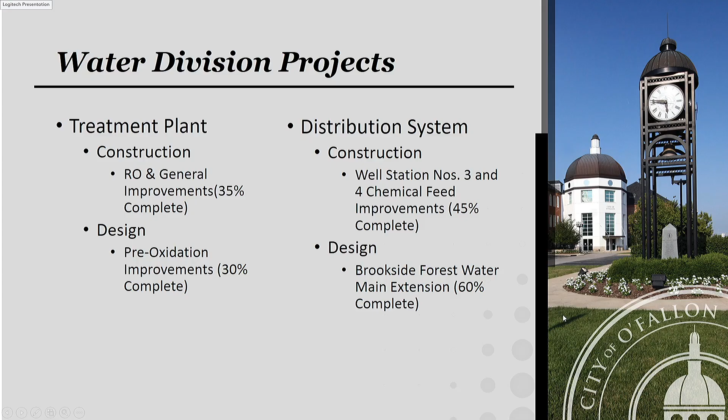As far as the distribution side of the water, we've got well 3 and 4 — water tower right here by Main Street McDonald's, and then the one behind Child's Tire on Service Road is water tower number 4. Those two are undergoing some chemical feed improvements. And in design, we got a Brookside Forest water main extension under design right now. Let me jump into some of those in more detail and show you where we're at.

The biggest project we got going on right now is our water plant project. It's about a $10 million upgrade. We're probably just not quite halfway through construction, I think. It's scheduled to be complete early next year.

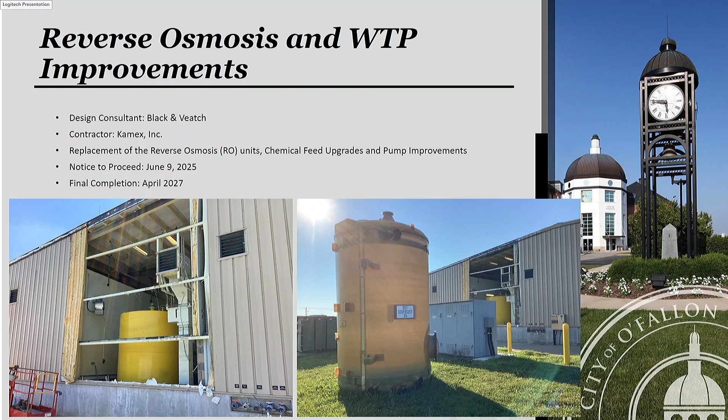They actually got that tank installed today. They'll be putting the sheeting back up tomorrow, hopefully before the storms get here. So, a nice little upgrade to our chemical feed system out there.

So those are a more energy efficient process for our plant, instead of just running a pump at 100% speed and regulating flow with valves. This actually controls the speed of the pump.

So if you can turn that pump down, you don't need to pump as much. You can save electricity by not having to run it at 100%.

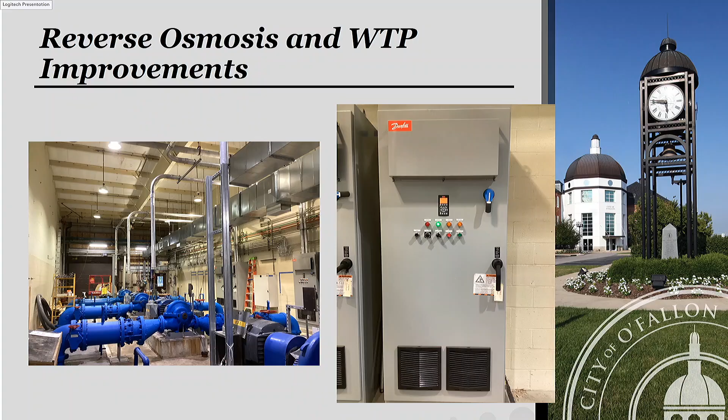Not much has really changed since the last update on the pre-oxidation project. We're just working through design with the engineer. They're working on getting the 30% design submitted to me, which should come in probably this month. Once we get that, we'll review those documents with the engineer, offer any comments we want changed, and then move on to the next step, which will be 60% design.

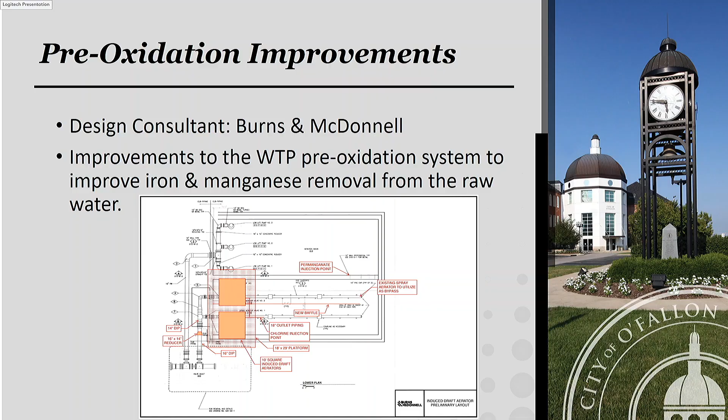It might go too fast, so if you got questions, feel free to shout them out. On the distribution side, this is the Well 3 and 4 project, chemical feed upgrades. Again, this is the tower along Main Street. There's a well house there, and then the tower I call Child's Tower, up North Outer Road there.

So they're currently at Well 3. We didn't want to shut both wells off at the same time to do these projects, so we actually have Well 3 turned off right now. Well 4 is still in operation, just because we're in higher summer demands with the water, the temperatures, and the dryness as the season goes.

So it's shooting to be done here in the next few months. It's going to take about 6 to 8 weeks each well to get the chem feed improvements in. It's new sodium hypochlorite tanks with transfer pumps and metering pumps, and then a new LAS, liquid ammonium sulfate tank, with transfer pumps and metering pumps.

That'll convert our chlorine disinfection product to a chloramine system, which will match our water plant and match all our other distribution sources in town. So it'll provide a better water quality consistency through our system.

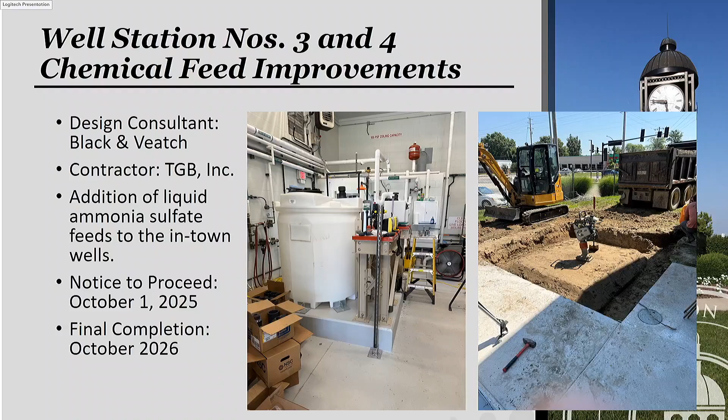Let's see, Brookside Forest Water Main. This one's getting close to wrapping up design. We've got 60% drawings here recently from the engineer on that. We've reviewed those, and I think they're now proceeding towards 90% drawings.

My project manager, Max, is handling this project, so I don't have all the details, but I know we got these drawings and reviewed them. So this one extends the water main, a new main from Progress West Lane over to the Brookside Forest area on the other side of Peruque Creek, just to give a redundant water supply to that area.

Right now there's one main that feeds that neighborhood to the west side of Peruque Creek, and if that main would happen to have a failure at some point, we would put a lot of people out of water. So this is just kind of a redundant source for that area, a backup.

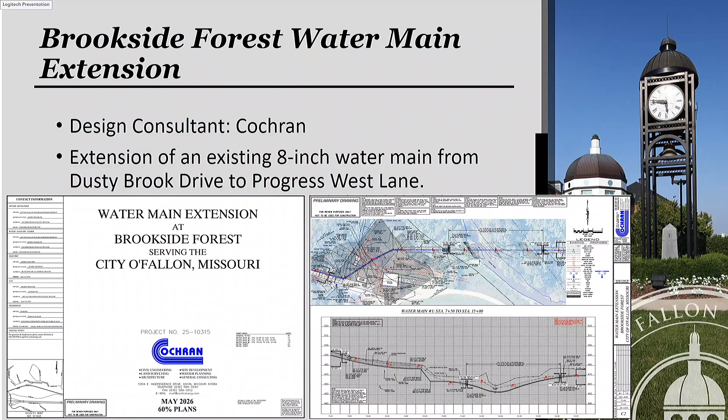And back onto the sewer side of the world. A couple projects in construction at the treatment plant and a couple in design. The biggest one, which is actually pretty much done now with just a handful of punch list items remaining, is our solids handling improvement project. That was our new headworks facility that we recently constructed. I think you guys took a tour of that a couple months ago, I guess it's been.

The grit system project is well in the middle of construction right now, and that one's moving along well. Odor control upgrades is about ready to get started. We're waiting on the equipment to show up, but we'll get into details here in a second.

The two in design are our sludge dewatering improvements and a wastewater treatment plant improvement project, which design's complete. We're just allocating the funding for it now in the future budget years.

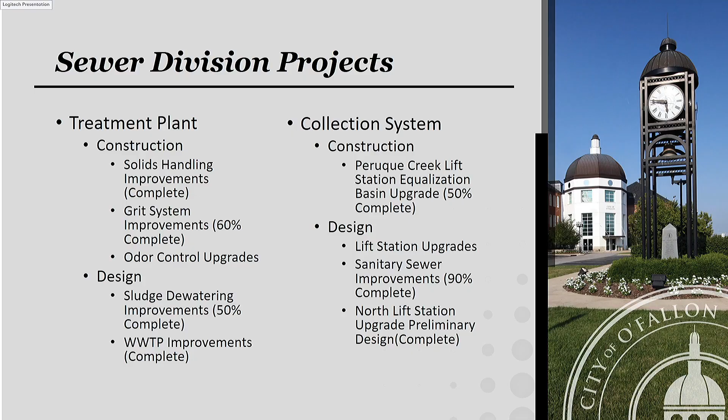On the collection side, Peruque Creek Lift Station project's in construction, and there are 3 design projects: lift station upgrades, sanitary sewer improvements, and north lift station upgrades. So let's get into those.

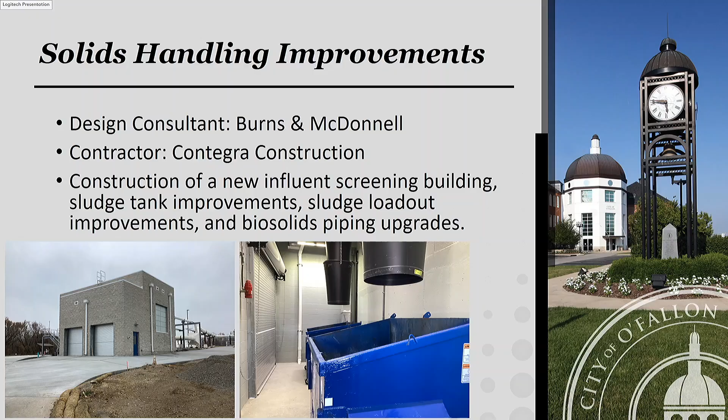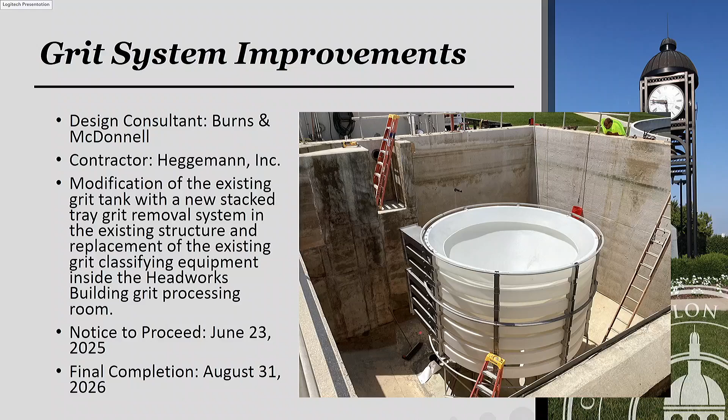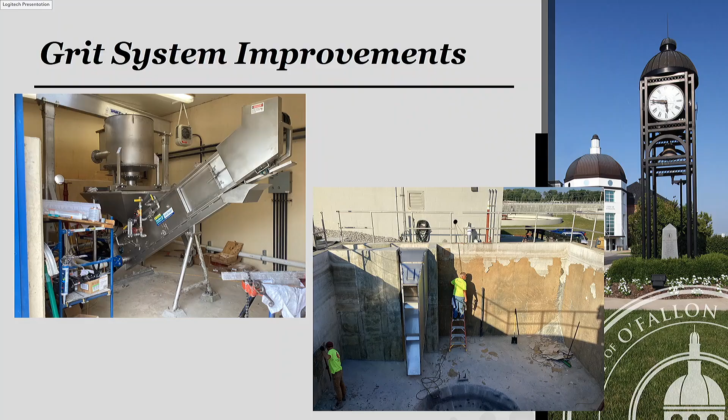All right, let's see what else we got. Sludge dewatering improvements - this is really neat, going on right now at our plant. This one's still in design, but we're actually piloting some of the equipment we're looking at for the project. This is where we'll take our biosolids sludge from the facility and dewater it. Right now we currently have an old belt filter press and two newer screw presses that do the dewatering for us. This will replace the screw presses. We've got a project with the equipment company for the belt filter press to rebuild it coming up in September, but this will replace the screw presses that aren't really performing for our sludge dewatering.

So these are called centrifuges. It basically spins really fast, separates the sludge from the water, and has a scroll on the inside that takes the sludge cake out one end of the system while the water goes out the other end. Very efficient process, a lot of throughput through the machine on a very small footprint. It's a very enclosed system, so you don't have water spraying, and people aren't breathing it, smelling it, or wearing it home at the end of the day. It's efficient and improves the environment of that area in the biosolids building. If you've ever been in our biosolids building, sometimes you wear that odor home with you.

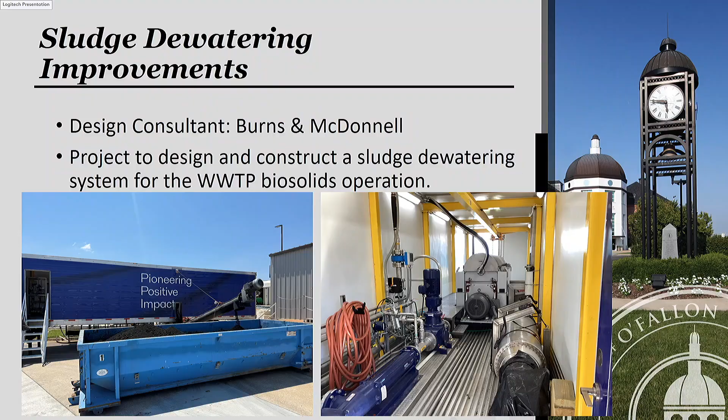Let's see. Again, that one's kind of top of my brain because I've been working on that pilot for a while.

Odor control upgrades - this is one that's actually been in construction for a little while, but there's a decent lead time on some of that equipment. All the submittals have been done, we worked through that, and we've got the equipment on order being fabricated. It's supposed to show up around October, I've heard. The contractor will start mobilizing in September, doing some pre-demo work and getting prepped for the new equipment to show up. Not a whole lot to update there - no pictures yet since there's nothing to show, but it's coming.

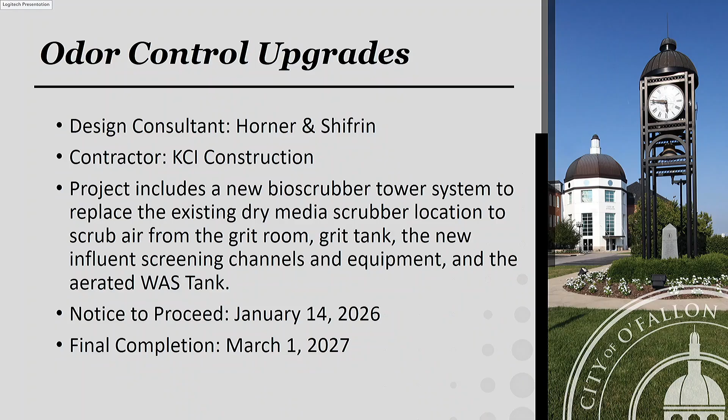And then the wastewater treatment plant improvement project - this one's design is pretty well done. We're allocating, I think, some funding next year for this to start a rehab of one of our clarifiers. We're waiting on the funding to come into place.

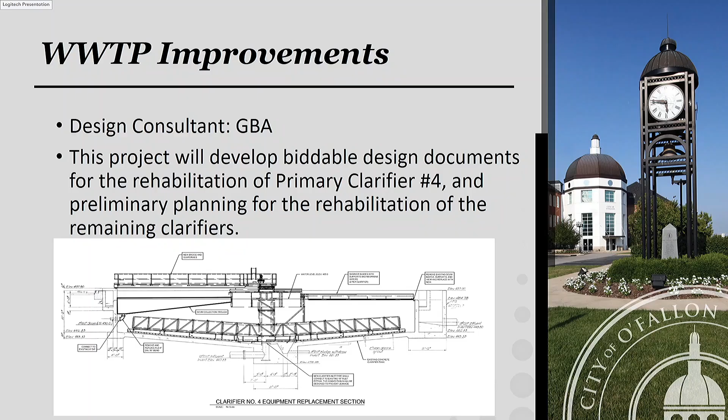On the collection side of the system, this is our Peruque Creek lift station upgrade, EQ basin project. The contractor should be remobilizing - I think he said this week or next week - to start work inside the basin, building the swale, some concrete structures out there, and then install the diesel pump system that'll pump the flow back to the lift station that takes it to the plant.

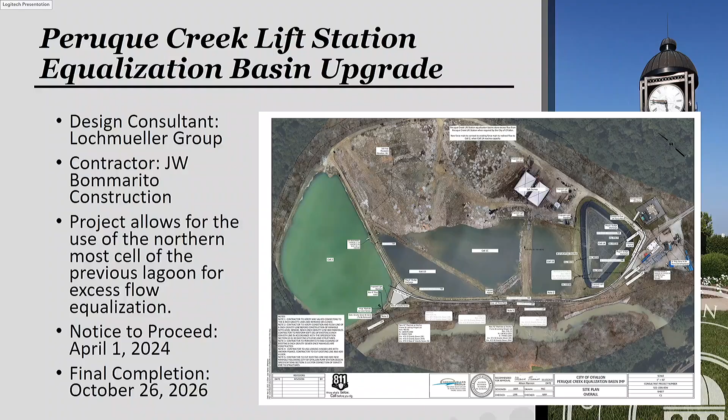Lift station upgrades - not a whole lot to update here. The engineers have come out, done some survey work, done some 3D scanning, and now they're taking that into the design stage. Max is my project manager on this project, so he's been working with them, but nothing's submitted just yet. They got their survey done recently and are working through the survey data, getting it built into some drawings.

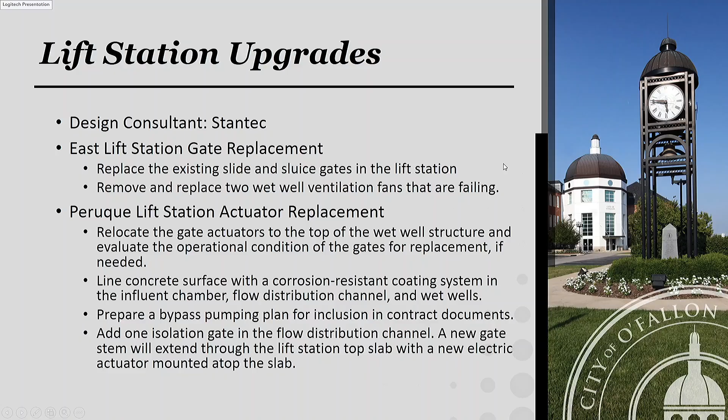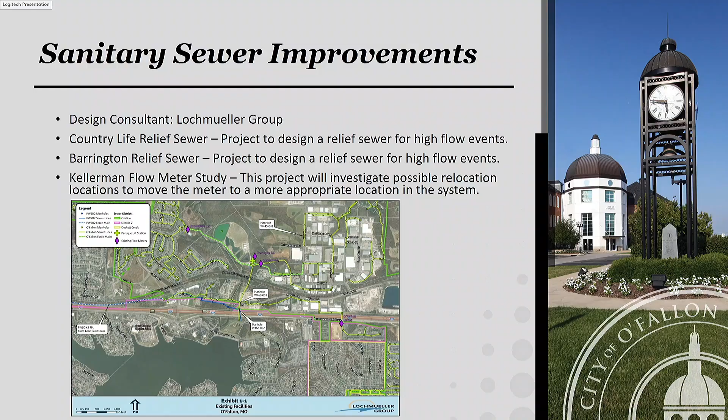And we're working with the company on which one they prefer, and then one up here just off Hoff Road where a force main comes in just upstream. So that would help us simplify our kind of confusing calculation for invoice billing for District 2 flows.

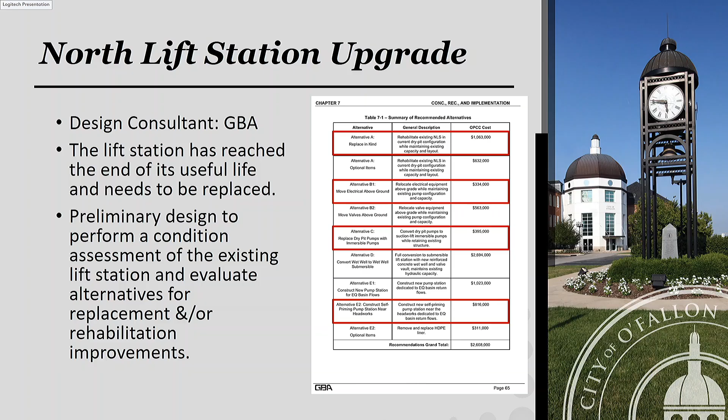And I think the other piece too, we want to bring the electronics from below grade to above grade, to get them out of that environment and make them more accessible, because it's not a fun little elevator ride down into that hole. So, I think that should do it.

Yep, any questions? A quick one on dewatering—are we paying the whole bill on the new system, or are we getting something returned from the screw presses that aren't performing? No, the screw presses—that comes a little before me—but no, they didn't perform initially.

They blamed it, I think, on filamentous bacteria in our sludge and a few other things. We've since cleaned out our sludge tanks, and they were able to barely pass their performance after we cleaned out our sludge tanks and everything else. So there was no further action after that.

Okay, alright, other questions? Bill? Sean, that lift station you're talking about that needs to be replaced, North Lift Station—right, what happens if that should go down completely?

We would be scrambling to pump out of the manhole upstream of it, because it actually doesn't take long to start backing up into people's homes, just across 79 there in the Home Field area, I think.

It's got about an hour or less, depending on the flows and the rain, dry weather or wet. It's not a whole lot of time before it'll start backing up. So yeah, we'd have to set up some portable pumps to pump out of the structure upstream of it, to put it into the plant or the EQ basin or something—we'd have to bypass around it. But it has 3 pumps in it.

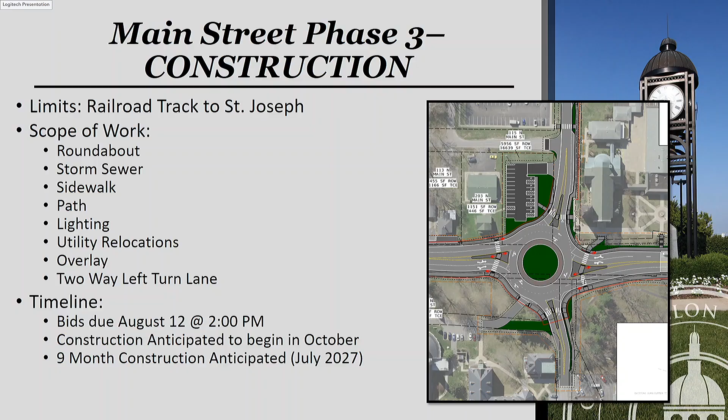So I know the question is, how are you going to build this large roundabout? I'll kind of go through our current phasing plan on what we're bidding this out with. There might be some changes based on the contractor coming in and having some suggestions to help maybe with traffic flow. But right now, this is just a full overview of the project.

So we have the two-way turn lane right here. This is St. Joseph over here, and then the railroad tracks obviously on this side. 3rd Street right there where the roundabout is.

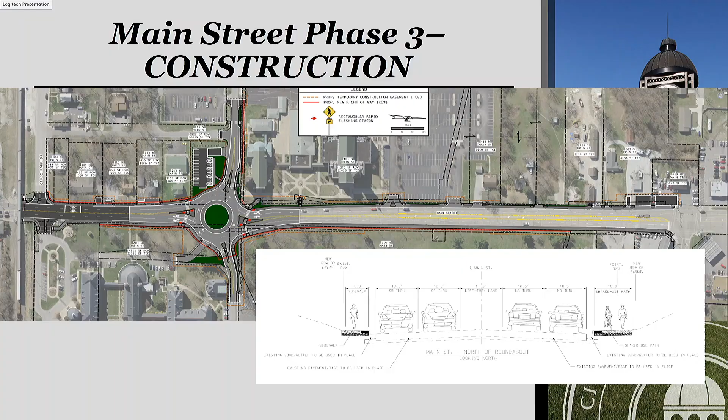So the first phase we're looking at is working on the east side of Main Street. Main Street would be cut down to 2 lanes, 1 lane northbound, southbound. We would put temporary signals in at 3rd Street to help with the school traffic and the church traffic there. We'd separate off that work zone with some barricades and channelize 2 lanes of traffic north and south on Main Street, and then work on that east side of the roundabout. So it's kind of 3 main chunks that we're looking at.

So they're going to work on building this east side, kind of on the City Hall side, and then we put some temporary asphalt in where the middle of the circle is.

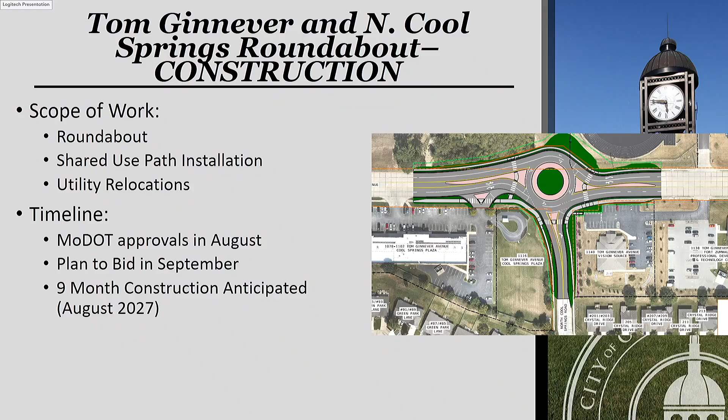This one is going to follow a very similar pattern to the Main Street one. We've done that process with another roundabout up by 64 and Highway DD. So again, cutting traffic down to one lane each direction. In this case, east and west, one direction each way, while they build the north side of this roundabout.

And they will keep North Cool Springs access open during this phase of the project. Then we'll have to switch traffic and build the south side of the roundabout. There'll be a little bit of temporary pavement in the roundabout to allow that to happen.

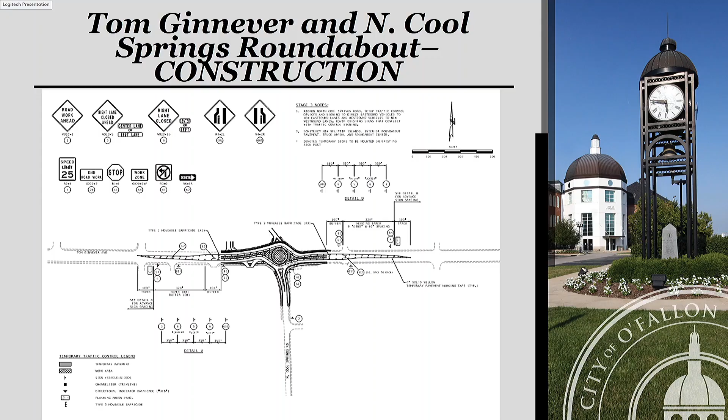Now this phase shows Cool Springs blocked off the entire time. Most likely it'll be held open until we have to cut that off for the connection, because it'll need to be connected into that roundabout, at which point we'll have to detour traffic back down North Cool Springs out to Cool Springs Industrial to TR Hughes. Then the third phase is just that center portion, taking out that temporary pavement and then constructing the pavement and the medians for the project.

And those are the projects we have coming up in '26, so those are the most current ones you'll be seeing here pretty soon. That's all I have. If you guys have any questions, happy to answer those now.

So quick timeline on Cool Springs. When is the anticipated closing of Cool Springs being able to get to Tom Ginnever? That would be towards the later stages of that project.

We're looking to have this one out to bid in September, and hopefully get construction started late this year. I'm guessing April maybe it might close, but not concluded till August, right? Probably not, yeah, because it's a full reconstruction, the grades are changing for that roundabout, so we have to take out a big chunk of that Cool Springs.

So Councilman Wilcox, you have a 4th of July problem. Because that's the only way anybody who lives on the north side of town can get anywhere when the festival's going on, and we've run into that before on a previous project too. We'll work through that, that's a good point. Even on the Main Street one, there's a parade in the middle of that. So I'm not saying we can't figure that out, but keep in mind you've got multiple closures that happen for that one week of time. TR Hughes, you can't get up it, so.

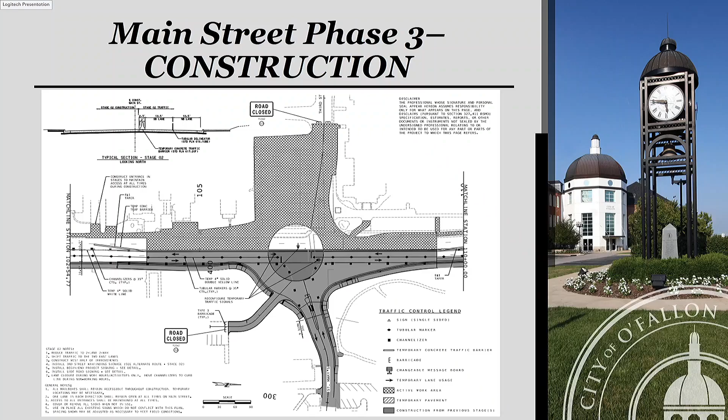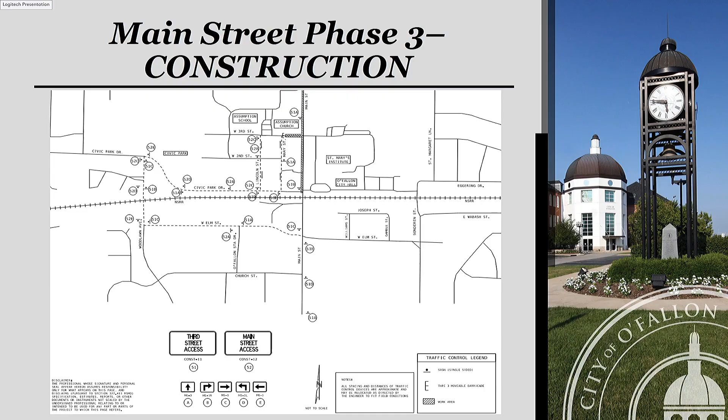When we flip to the west side over by Assumption, that's when we will detour traffic going down 3rd Street. So if you're normally heading down Main Street and head west on 3rd Street off of Main, we're going to have you go down to Elm Street, around to Civic Park Drive, then down Mary Street and back around. Once you get off Civic Park Drive we have some one-way streets there, but we'll have signage to direct traffic around. That'll pretty much be the same for the last phase too, when we do this little tie-in, just a few minor tweaks, because Mary Street will be cut off when we tie it in at the very end.

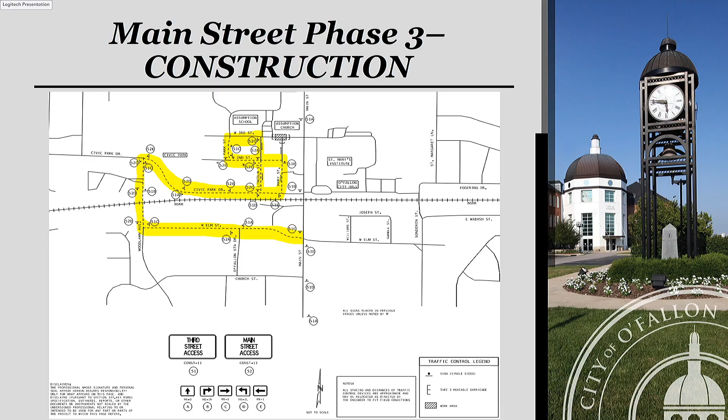Did you want me to run through Eggering here again? No, thank you, that's it. I just wanted to know about it. Thank you, Paul.

Bob: On phase 1, are there any communication facilities on those poles? For the Main Street Phase 2? There are - Brightspeed and Charter are both on there, and we've coordinated with both of them as well. I think they were still putting in the conduit, so they're still on there, but there will be some coordination. Ameren's got to get their lines under too, so we are coordinating with those facilities as well.

Bill: On the first one, East Terra and Pittman, can you explain that again? I think it was the first one you had construction project up there. Oh okay, so over Main Street Phase 2 here, where we're going from Terra Lane to Pittman? Yeah, right.

Can you explain that again? Is that East Terra? That's Main Street, from Terra Lane to Pittman Street.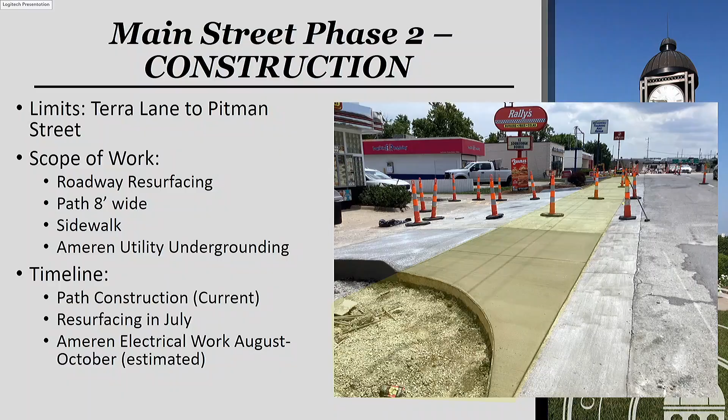This work on Main Street is close to getting done. Daily there's usually one lane of traffic while they do sidewalks and paving, and they're waiting on poles. Daily lane closures will be less and less. There will still be a few here and there to accommodate the electrical work, but a majority of the path work is done, same with the paving.

Okay, Scott? Yeah, hi Paul, a question about the Eggering Drive project and the sidewalk. You mentioned the sidewalk - will that be a multi-use path from City Hall to the park?

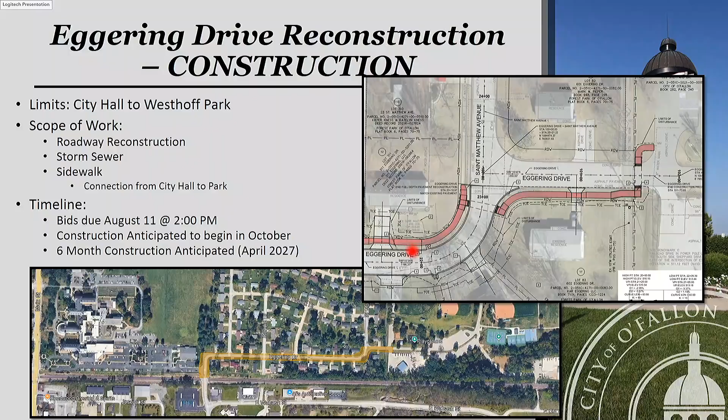That one will actually be a 6-foot sidewalk, just based on the constraints of that area - we couldn't get a larger path in. If you travel that area, the houses are kind of high off the road and the driveways are already pretty steep, so putting even a 6-foot path in makes those driveway angles really steep. There's just not a lot of room, as you can see in this picture between the house and the street. If we put a 10-foot path in, it'd take quite a bit of their front lawn, so this is just a 6-foot path.

Thanks. George? Paul, it sounded like you were saying Main Street is going to be no longer a way for ingress or egress from City Hall. Yes, sorry, the picture probably didn't quite show that. There's some work that's going to occur at the entrance of Main Street - we're reconstructing the entrance there, so likely it will be shut down for a period of time. It won't be shut down for the entire project, but the main detour is going to be heading down Elm Street. Will that be in conjunction with the work on Eggering?

Will it be open or closed for the whole project, to have that egress and ingress into City Hall? Yes, so that'll be maintained - the primary ingress and egress of City Hall will be like it is right now with the front entrance closed. It's going to be off of that east entrance, off of Eggering. So with the Eggering project, as part of that, we're going to keep access to and from City Hall from right there, let me just zoom up here.

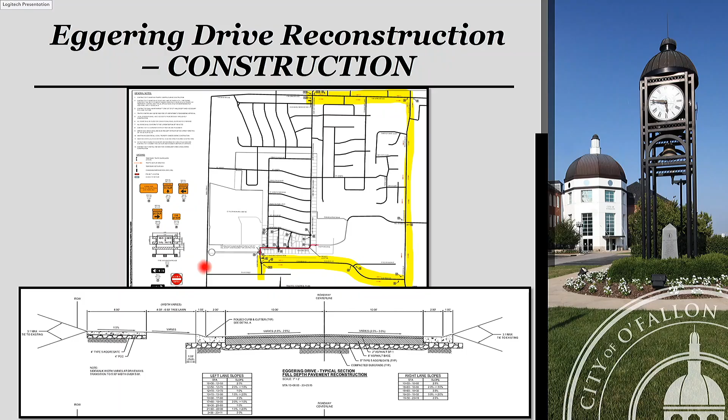Yeah, so right here, that'll be two-way in and out of City Hall. So when we're detouring people down Elm and then up, they'll be able to get to City Hall off that east entrance, in and out.

Okay, any other questions? All right, thanks Paul. Thank you, good update.